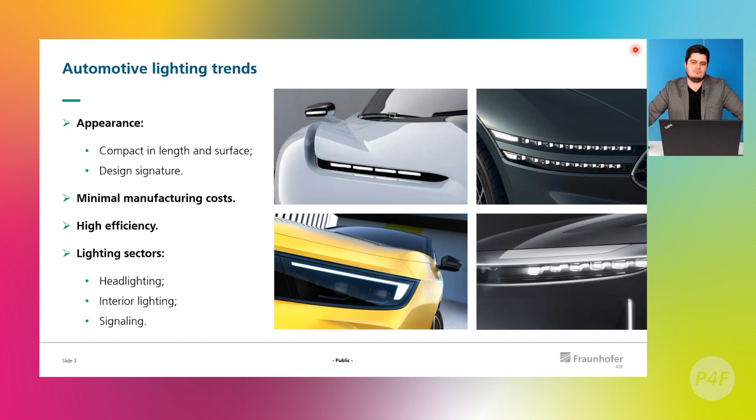At the same time, of course, we would like to minimize manufacturing costs. We do not want to lose money on each unit of the module. It still has to be efficient, especially for headlights, because we still need quite enough light on the road ahead of us. So while being compact, we cannot lose too much light. And this is not only applicable to headlights, the same is true for interior lighting and for signaling.

Before I proceed with the motivation for us in this development field, I would like to remind everybody who is already familiar with this concept, and explain for the new audience, what kind of micro-optics we are talking about.

So roughly 10 years ago, in our institute, colleagues developed a so-called arrayed projector. It's a simple system, really compact. It consists of an LED source, in most cases white light LED, then a simple collimation lens, just a single lens, or in some cases two lenses, to collimate the light, and it shines through the micro-optical component. The micro-optical component is a double-sided micro-lens array.

It has a really simple structure. Two micro-lens arrays stand in their mutual focal plane. The entrance microlenses accept light from the main body of the system, and then they target this light through the projecting microlenses, which act as tiny imagers.

Right behind the entrance microlenses, we have a slide mask, or masks, which are nothing else than openings in the form of the pattern we would like to project somewhere on the screen or on the road. These masks individually are imaged by each of the exit microlenses.

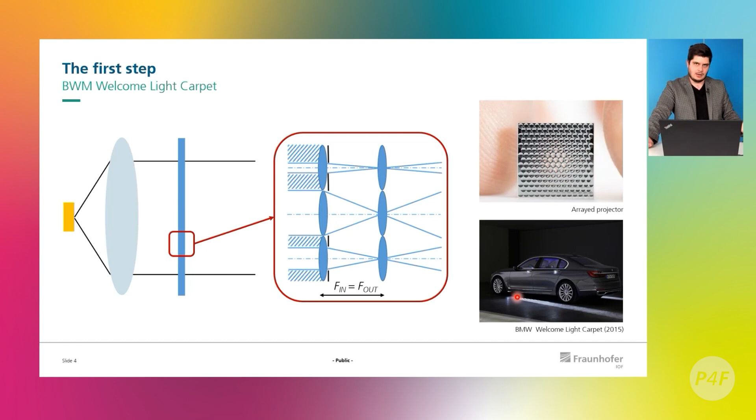And this technology was used for the well-known device called Welcome Light Carpet, developed together with BMW and our institute in 2015. It's really compact. The idea is to project nice recognizable features somewhere around the car - for example, this one welcomes the driver - and there is not so much construction space underneath the car. So compactness was the killer feature for this device.

And by saying it's compact, I really mean it's compact. This is the surface of the micro-lens array which projects the pattern - it's a little bit less than my finger.

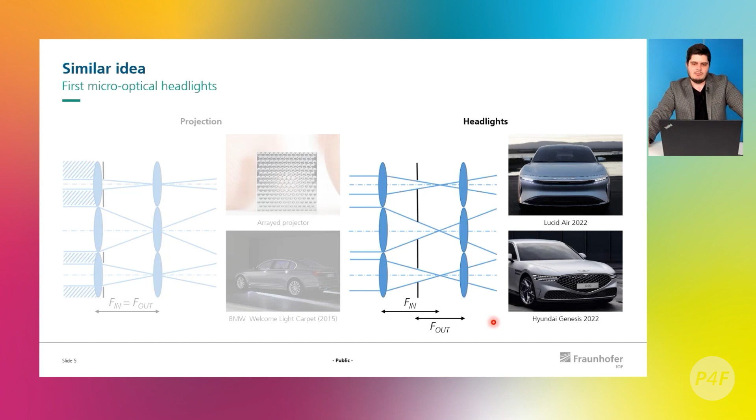The same idea was also applied in a couple of cars, the Lucid Air and the Hyundai Genesis, in 2022, for the headlighting. Same idea, slight differences for the sake of different function, but we still have the absorbing masks which act as the beam shaper - they form the contour and the profile of the beam in the way we need it.

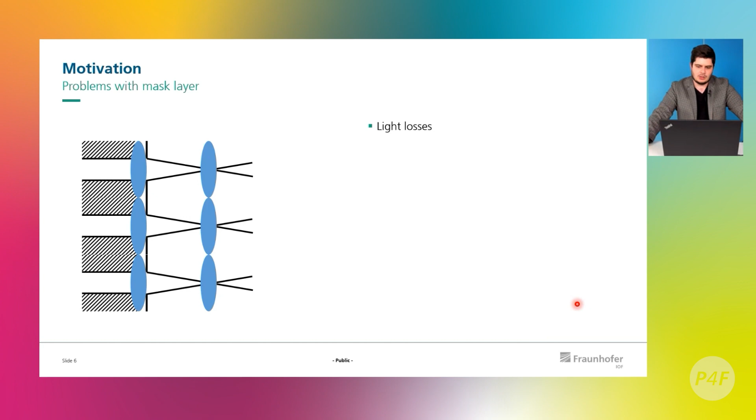If there are masks, or in other words absorbing elements, there are obvious problems with that. First of all, we lose light, so we are not being really efficient - we block most of the light cone which enters the micro-optical beam shaper. Second, this light gets absorbed by the masks and heat dissipates a little bit around the component, which can cause unwanted element aging.

And last but not least, and actually the most important, is that to produce such a component on a large scale of area - not the small one I showed you, that's okay, but if we want to apply it for a headlight it's much bigger - it means mass production gets more and more expensive, because we have to apply alignment. These two sides, or actually three sides - entrance microlenses, masks, and exit microlenses - have to be really well aligned with each other. And doing this while producing at mass scale, each time for each unit, is a little bit costly.

So this is basically our motivation for the further developments. The idea is to get rid of masks, or as we say, go maskless. But we still need to do the same kind of functions for the pattern projection and for the beam shaping.

And the advantages are clear. First of all, we bring up the transmission. And second, we potentially make the manufacturing processes a little bit simpler and less expensive, because if there are no masks, if there is nothing in between these microlenses, then it can be a monolithic structure.

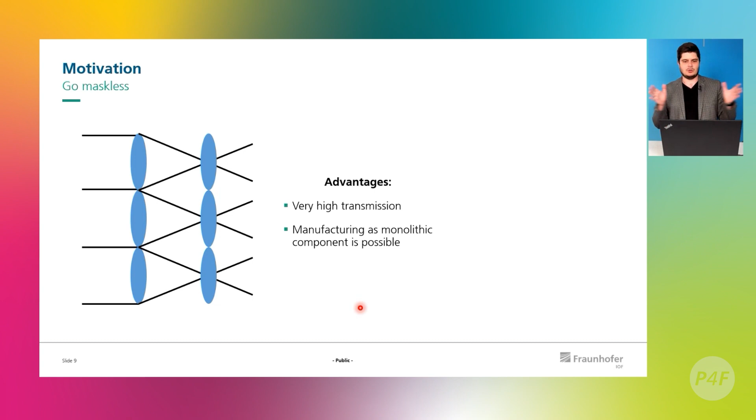So to prove to you that it's actually efficient and nice, we are going to discuss today three showcases, three different systems built on more or less the same approach with maskless micro-optics. The first one is projective turn indicator, or in other words, blinker. Second is low beam, and the final one is adaptive driving beam.

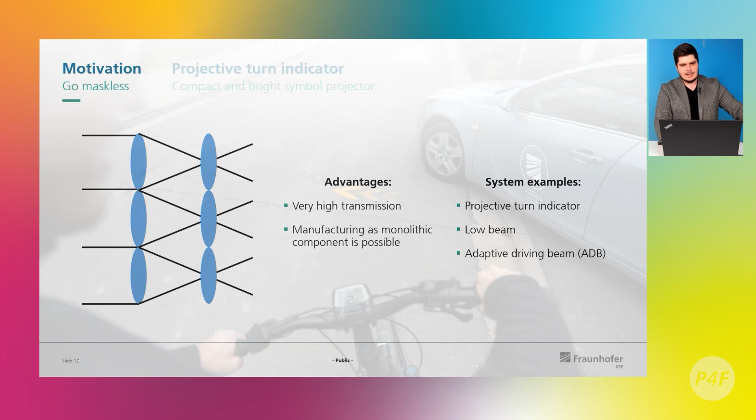So we start with the projective turn indicator, and by projective I mean that it's a device which projects the chevrons, which indicate the direction of the turning of the car, onto the surface of the road, which can be recognized well by pedestrians and cyclists to increase a little bit the safety of driving today.

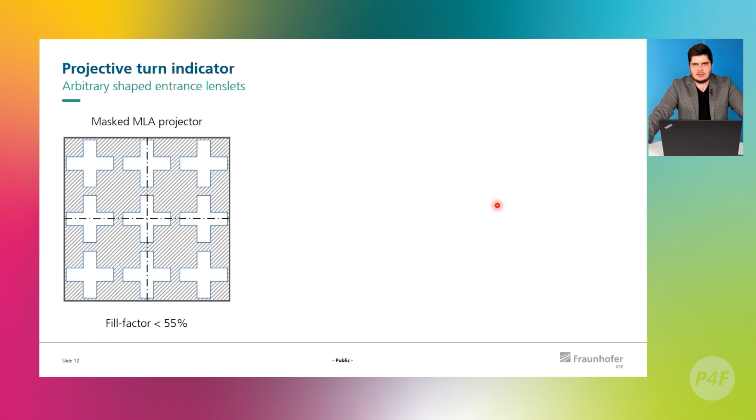So let's assume that we still have masks and we would like to project a certain pattern on the road, for example this cross. If we have masks, this looks like that in the front view, and you can easily see how much area is lost. So the fill factor is less than 55%, and it's not nice, it's not efficient.

Our idea is to remove masks and let the entrance microlenses act as the object to be imaged or projected on the surface of the road or on the screen. It means that the entrance microlenses themselves have to have this shape which we are going to project, for example this cross again here.

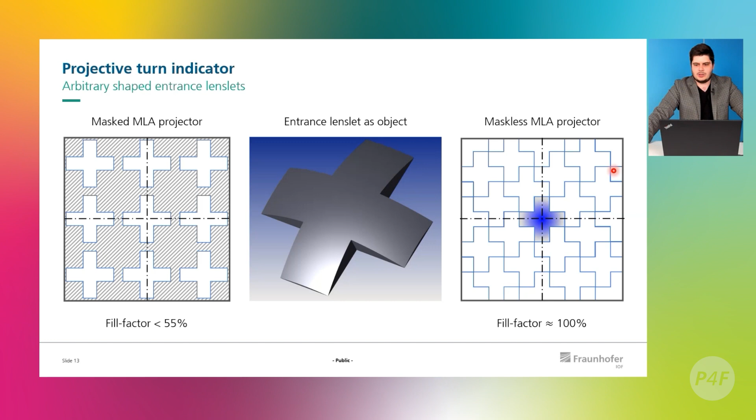And when we tile these entrance microlenses next to each other, we can see that the fill factor, the area which acts in a useful way for us for the projection, is actually around 100%. So potentially it brings a lot of transmission in the system, and it makes our patterns on the road or on the screen much brighter.

When it comes to different shapes, there are three different possibilities for such systems. The first possibility is when our desired pattern is already tileable by itself, so that we can replicate this pattern on the entrance array and we will not have any dead zones, we would not have any gaps between the microlenses. This is the first and the nicest case.

If we wanted to project a letter T, for example, this is a little bit more complicated because you cannot tile such a lens next to each other without any gaps. But in this case, we can decompose the pattern into elementary structures and then project them accordingly to form the final target.

And the last case, which is much more difficult to realize, is when we cannot avoid these gaps between the microlenses at all. For example, if you would like to have a projector which projects a homogeneous white rectangle, but under some angle, you have to take into account the keystone and distortion, and it means that the microlenses acting as objects have to be distorted in the same way. And it brings these dead zones.

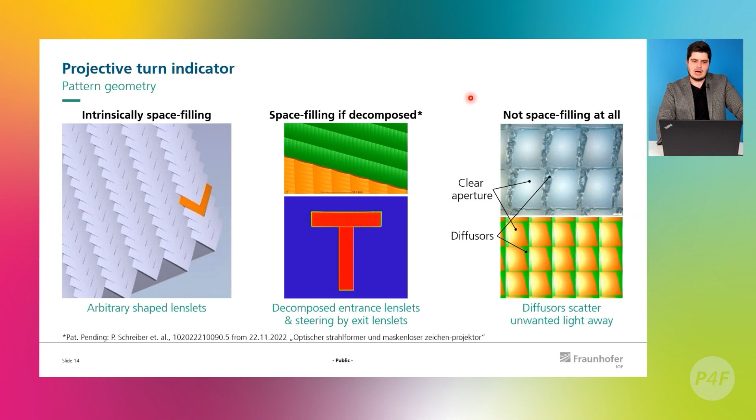To fill these dead zones with something, because we just cannot block them, there are no masks again, we decided to apply diffusive structures which would at least smear out this unuseful light around the whole projection. This brings a little bit of contrast downfall, but still keeps the system easily manufacturable and very efficient. So our case, fortunately, is with chevrons, the first one, so let's proceed with that.

So the idea in the project was to have a projector which can be installed somewhere in the headlamp of the car, or maybe where the usual blinkers are mounted, and it would project these 3 chevrons on the surface of the road. How to generate 3 chevrons with only one projector?

It's pretty easy. We apply something we call crosstalk. So if we have a single LED under the collimator and we shine with it through the micro-optics, then we would generate 1 chevron. And if we apply 2 more off-axis LEDs, then they are being collimated by the same lens, and they shine through the micro lens arrays under an oblique angle. What happens is that each entrance microlens starts interacting not with the opposing one, but with the next or next-to-next one. And this generates the twins of the original chevron.

And this is the function of this crosstalk, which we can utilize to make it semi-dynamic.

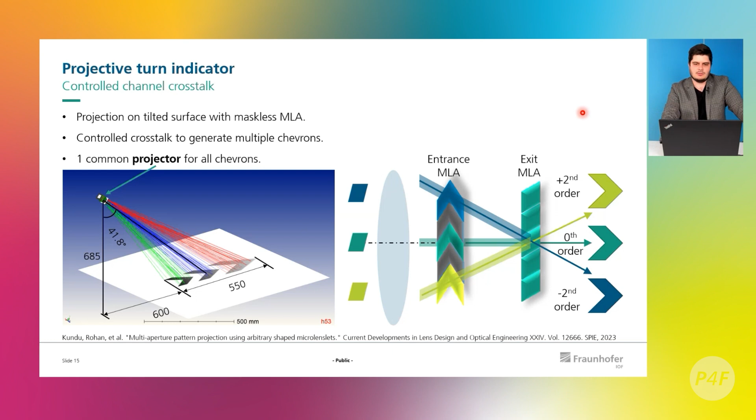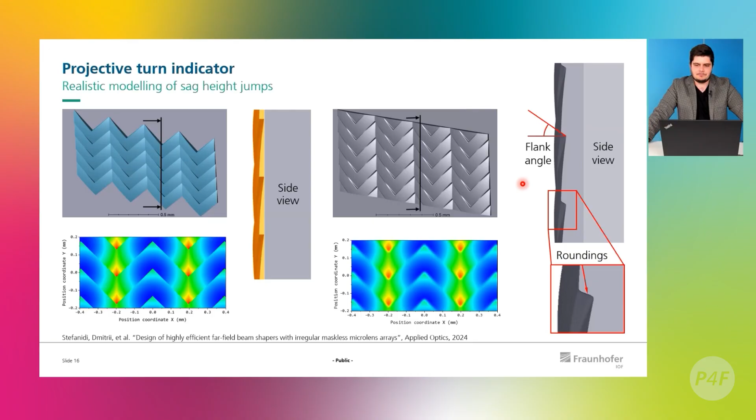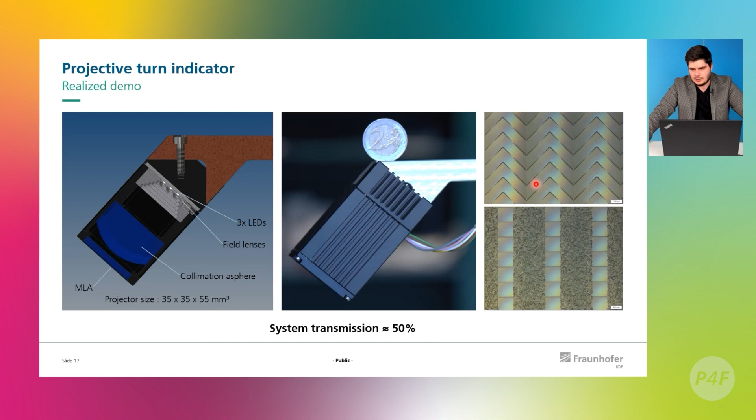And this is the realized demo. It's also not that bulky. I also have it here, so you can compare it with my hand, for example. So this is something which can be installed directly into the headlight and act as a blinker. Here you can also see a little picture of the microlenses through the microscope, and those dark lines are nothing else but the sag height jumps which I mentioned.

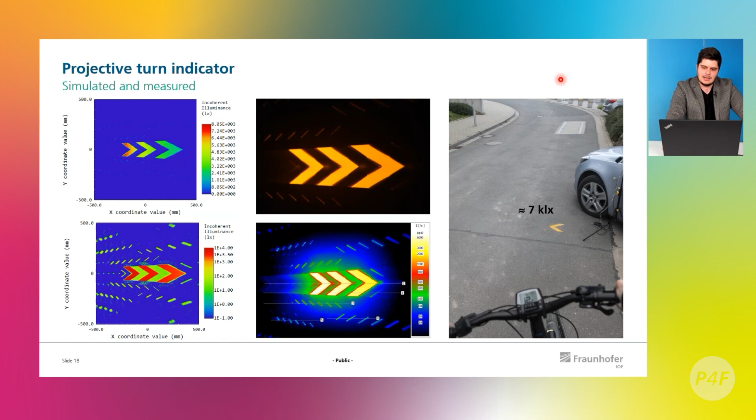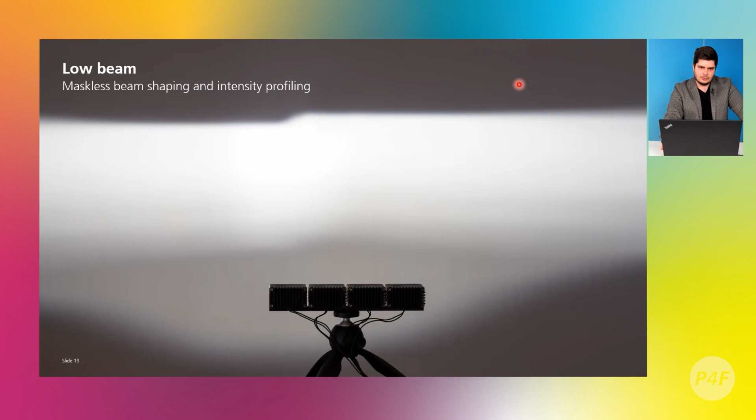So next would be the low beam. And the low beam is an entirely different system. It's a combination of pattern projection, something with a specific shape, and also the shaping of the intensity of the beam. Even though it's a different system, we still apply more or less the same concept: still micro-optics, microlenses, still maskless, but there are a few different details here.

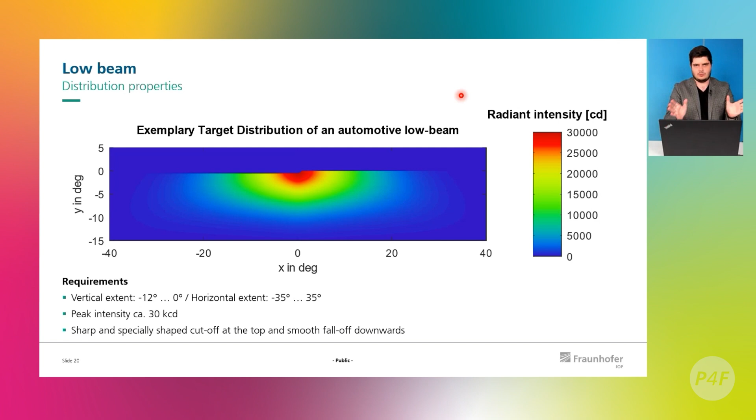So our target is to have such a beam when you project the low beam perpendicularly on the screen, not on the road, but on the screen. And the idea is to have a little bit more light on the right-hand side, so you can still drive safely, and a little bit less light, pointed a bit downwards, on the left-hand side to prevent glare for oncoming drivers. You can see here that the target is not homogeneous, that's one thing. Then the target is really, really large, so the horizontal field of view is enormous compared to the blinker, for example.

So we've designed a system which fulfills all the requirements for such a beam. It's a little bit more sophisticated. We still use one LED, but now a two-lens collimation system: a simple sphere from stock to collect as much light as possible from the LED, and then a custom anamorphic lens which produces this large field of view in the horizontal direction, which we need because the beam is really wide, and a narrow vertical field of view which later on will be shaped additionally by the maskless micro-optics.

The first task in this case is to be able to correctly accept this diverging beam with the micro-optics. Since there is not so much divergence in the vertical direction, or in the side view, we can start with a really simple regular arrangement of the microlens arrays. But in the horizontal direction, from the top view, you can see that the size or the pitch of these exit microlenses is noticeably bigger, and this helps us to correctly accept this large, wide, diverging beam from the collimator.

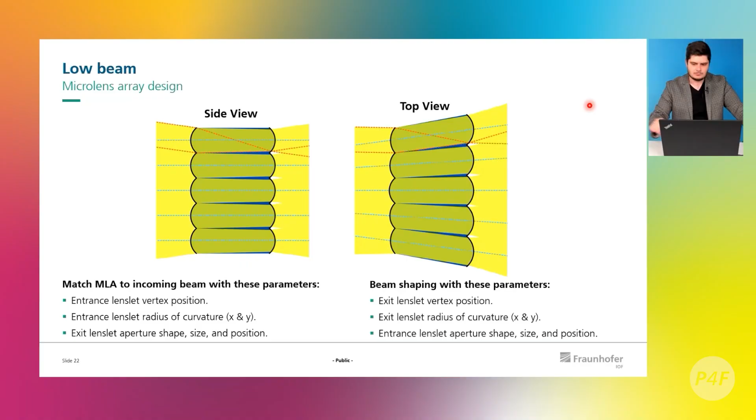Then there is another task: how to produce something which is not homogeneous, and still without masks. With masks, it's easy—you can change the opening of the mask in each channel. For example, here it's smaller, here it's bigger, and when they overlap in the beam with each other, you produce the arbitrary profile of the beam's intensity or brightness. But how to do it without masks?

The solution is what we call an irregular fly's eye condenser. A fly's eye condenser is a general arrangement of such optics, and irregular means that we start playing with the parameters of each individual channel in the system. We can change the size of each entrance microlens and its position, and we can individually steer the vertex points of each exit microlens to control each small beam from each channel individually. This helps us to create non-homogeneous, or in other words arbitrary, intensity or brightness profiles of the beam, which is essentially needed for the low beam.

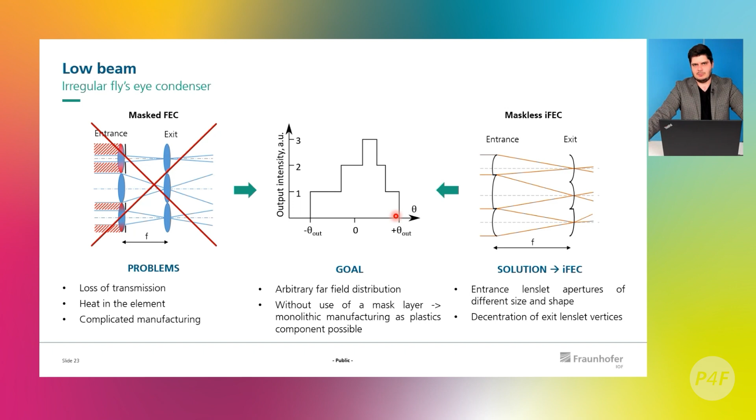And the last but not least task is to be able to produce this sharp and asymmetrical cutoff line with a kink in the middle.

So let's say that we start with a simple rectangular lenslet. As you remember, the shape of the lenslet is essentially something which is projected, so if the lenslet is a rectangle, then our beam will be in the shape of a rectangle as well.

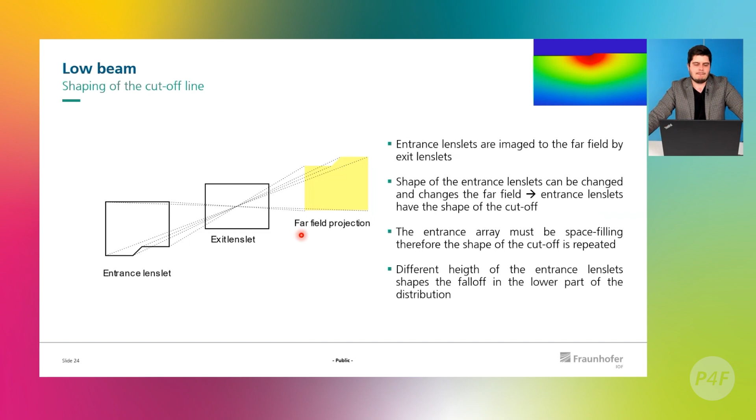If we start playing with the shape of the entrance lenslet, then it will be automatically repeated in the beam, because it's a simple one-component imaging. But to be able to tile such entrance microlenses without any gaps, we have to repeat these structures at the other side of the microlens.

And here it becomes a little bit tricky to explain. What we usually say is that whatever the upper edge or lower edge of one microlens is, it's exactly the lower or upper edge of the neighboring microlens. The problem then is that with such arrangements, the beam would look like a step with two kinks. But in our target, there is no second kink, so it's only upstairs.

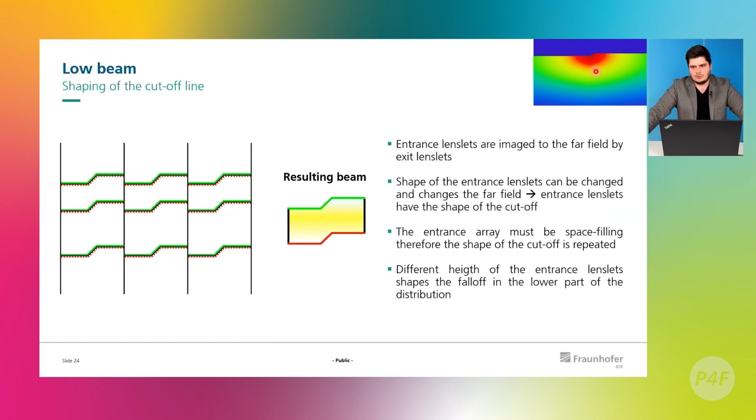And if we just let it be like that, then we are going to have what we call an evil twin of our kink, which is not allowed to be in the low beam. There's another trick - not final, there are many more - for how to hide this evil twin. We change at each channel in the micro-optics, and there are thousands of them, the position of this kink, and we realign the upper part with the exit microlenses afterwards in such a way that we still have the functional one and we don't see the non-functional one.

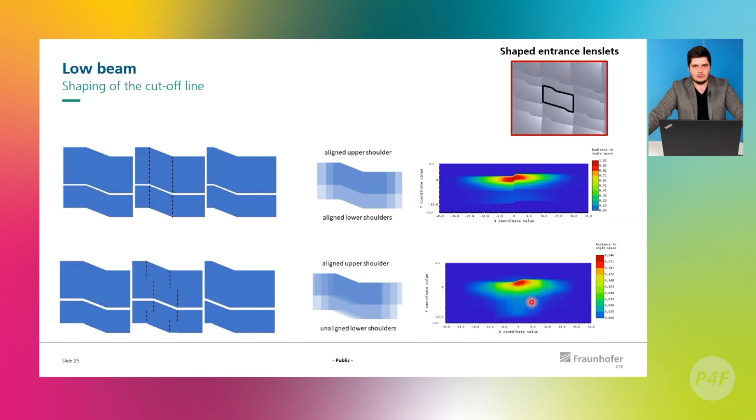So here we can have a little peek into the micro-optical structures. This is the entrance array, a really small part of it, taken from the microscope objective, and you can recognize those steps of the kinks. You can also see that the vertical extent of microlenses changes - this is for producing the vertical profile of the beam.

And the exit microlenses are a little bit easier in structure. These are just squares or rectangles, and yeah, these are not that interesting.

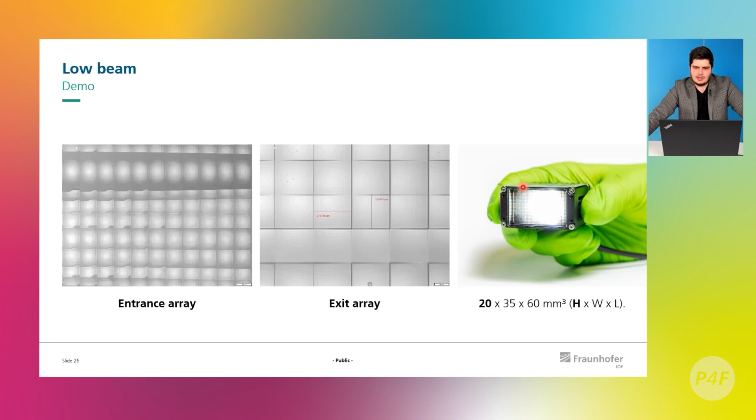And here you can see the picture of the module itself. I also brought it with me. So when I'm saying it's compact, I don't want to trick you - it's this. You can just play with it, put it in your pocket. If you have a power bank, you can shine it as a torch if you like. This is something which we do at exhibitions and fairs usually.

And finally, I would like to show you some optical results for the low beam. So these are two measurement pictures - not simulations, we measured that with specially equipped equipment, and then we processed that in software, I guess MATLAB, I don't remember. And here you can also see the real picture of the beam being projected at 10 meters onto the screen.

First of all, I would like to point out that the beam has really little amount of stray light - the light which we don't want to have in the system. There are some lines underneath the beam which also happen due to the SAG height jumps, due to these shaped microlenses on the entrance, but still these structures are below the beam. They can be blocked by housing and they are not going to be harmful for the driver.

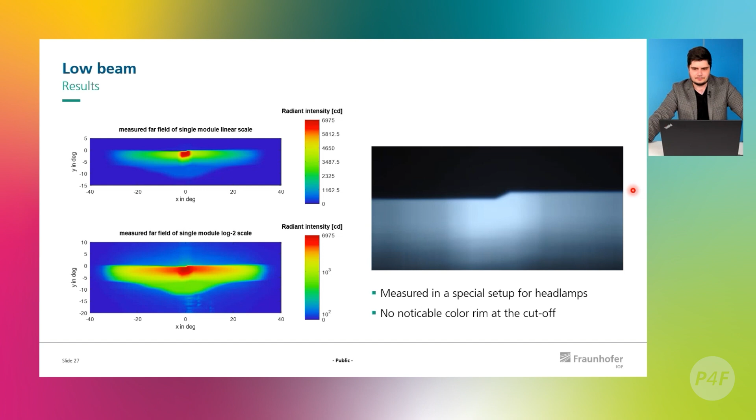So to summarize a little bit about the low beam, we were able with one of these little guys to produce 7,000 candelas on the road in the beam of the hotspot.

Those who know the regulations will say, of course, it's not enough. That's true. But we can apply, for example, 4 such modules, and this is the photo of the final demonstrator for the low beam, which would just overlap and then produce the sufficient amount of brightness on the road. So, for example, with 4 modules and the correctly chosen LED, we expect around 42 kilocandelas, which is even a little bit of an overkill for the regulations.

Sharp cutoff, no color, and most importantly, the transmission of such a system is roughly 70 to 75%, including a couple of percent of the stray light.

And this is what we are particularly proud of, because at least to our knowledge, right now on the market, such numbers are probably unreachable. So even if you have not really powerful LED, and if you especially don't have much construction space, this is a perfect solution for you, because the efficiency is something which essentially brings the brightness of your beam on the road.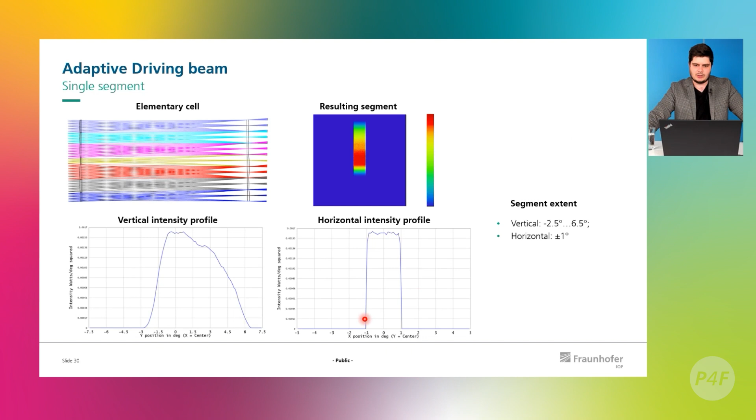Our target was for the extent of the segment to be approximately plus minus 1 degree in width. Obviously, the smaller the better, because then the beam becomes more and more flexible. You can switch off really fine features, but inevitably there are some limitations. In our case, it's diffraction, because the extent of the segment is directly linked with the numerical aperture of the microlenses, and if we go too low, we get noticeable diffraction, which brings down the performance.

As I said, we have to produce many of such segments. In case of these systems, there are 23 vertical segments which build the whole beam. To produce them, we apply the same concept we used for the blinker, the projective turn indicator. We apply crosstalk, meaning we use not only one LED on axis, but many of them, 23 in this case, each collimated with the same collimation optics, and each shining through the microlens arrays at a specific angle, which creates a set of adjacently placed vertical segments in the beam.

And obviously, if we switch off a particular LED, it means we create a certain vertical dark tunnel, also called an adaptation tunnel or safety tunnel, in the beam. The logic is simple: wherever you're driving, if your car detects with the camera another car somewhere 200 meters or maybe 100 meters away, the system detects that and automatically switches off the specific LED or LEDs to darken out this area with that car.

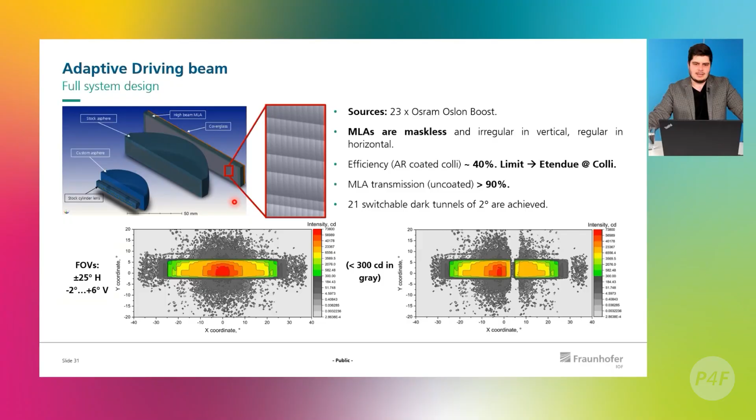We built a demonstrator and characterized it in our lab, but lab characterization is first quite boring and doesn't reflect reality, because the high beam is supposed to work at a long distance, more than 50 meters. If you shine such a module on a screen at only 10 meters, it looks worse than it's supposed to.

But we had to ensure we are able to create sharp dark tunnels, which is true. Those noticeable lines between the shining segments are exactly the result of insufficient projection distance.

So to really test it out, we took it somewhere on the road here in Jena, in dark surroundings, and pretended that we actually already have such a headlight. You can see the demonstration of the system pretty easily.

There is a pedestrian who just walks for no reason in the dark and talks on the phone, and the car detects that and switches off the specific part of the beam so as not to blind this person. On the road it looks actually as it's supposed to look.

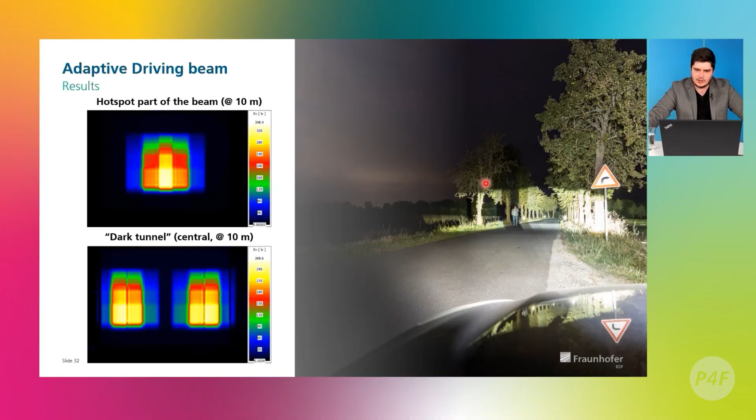To summarize, the third prototype I wanted to show you today is really compact. I didn't bring this one with me because it's a little bulkier than low beam, but our target was for the headlights to always fulfill a really small vertical extent of the system. I mentioned that compactness and design feature is key for development in automotive lighting, and today the trend is to have slim-like headlights that appear the same as the daytime running light.

So we hit that target. We were still able to preserve at least 40% transmission with that, limited by laws of physics. And we can reach pretty high values of brightness for such beams. With even one or two modules, we can reach approximately 100 kilocandelas on the road, which is way more than the regulations require.

Now I would like to talk about what is essentially a concern of every automotive partner. Everybody, after I give such presentations and show our demos, asks: that's nice, really impressive, but how can we manufacture them? And specifically manufacture with not so much additional cost.

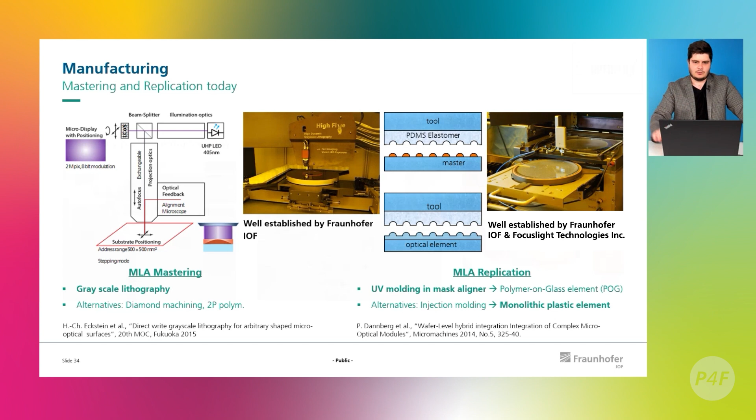But since we don't have any masks, we can enable other technologies to be applied, for example injection molding. And here is where we are sure we can save some costs for mass production.

We had a project done together with our partner Optoflux, where we wanted to repeat our masters for the blinker, for the chevron-like microlenses, with high precision injection molding.

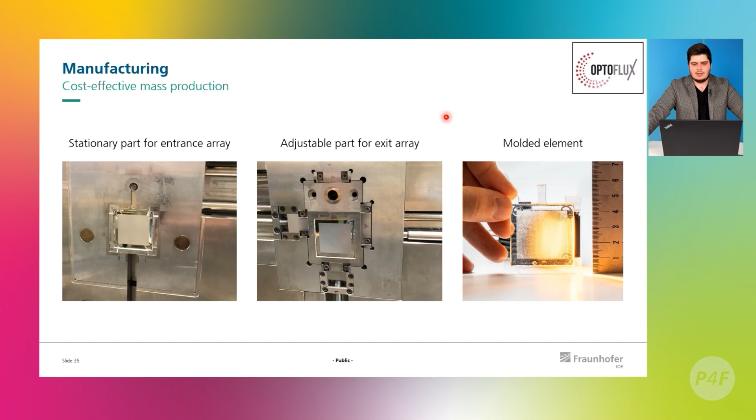Here you can have a little hint of the tool. One of the sides is adjustable, so the idea is to perform the alignment one or several times before mass production, fix everything, and then just do the shots and produce many of such components to save money.

The target of the project was to prove that we actually can do that with sufficient quality. Here is the first visual hint of how these micro-lens arrays look with two different ways of production. On the left-hand side is polymer on glass, our gold standard, basically the standard for quality. On the right-hand side is what we would like to study, the injection molded pieces.

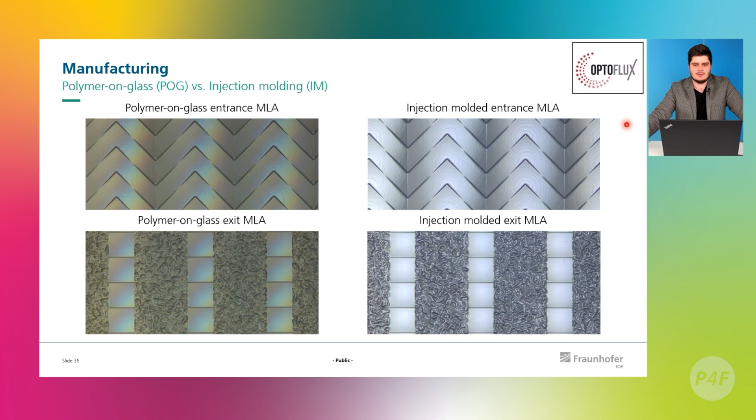Visually there is no difference - they look 99% the same. And fortunately, the performance is also not that far away from each other.

So, for example, if we get into the details and check all the optical parameters like the radius of curvature and the extent of a single microlens, we can see that the difference between the two manufacturing techniques is really, really small. With the polymer on glass technology, we had roughly 2 or 3% deviation from the master, and only 1% deviation with the injection molding. That was really a fortunate occasion.

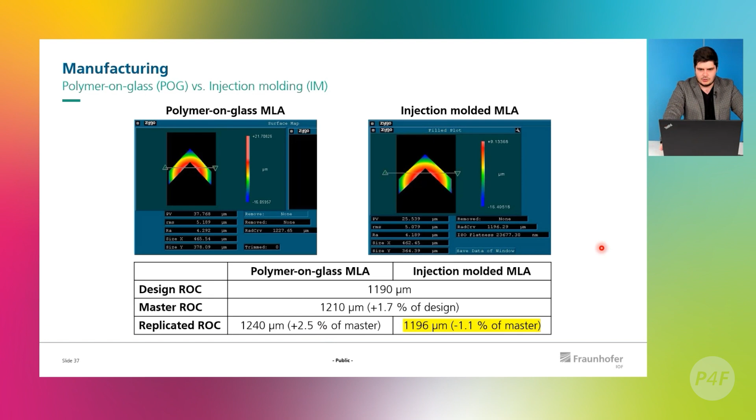One more detailed slide. We took 3D topography scans with a white light interferometer of these structures to analyze the regions between the microlenses, since these are the most important—they bring most of the stray light into the beam. We can see that these regions for the two manufacturing methods are close to each other; the difference is only a couple of degrees in the slope of these dangerous regions.

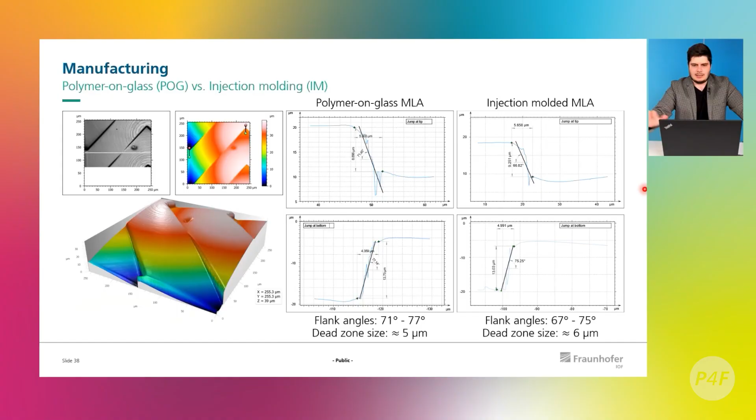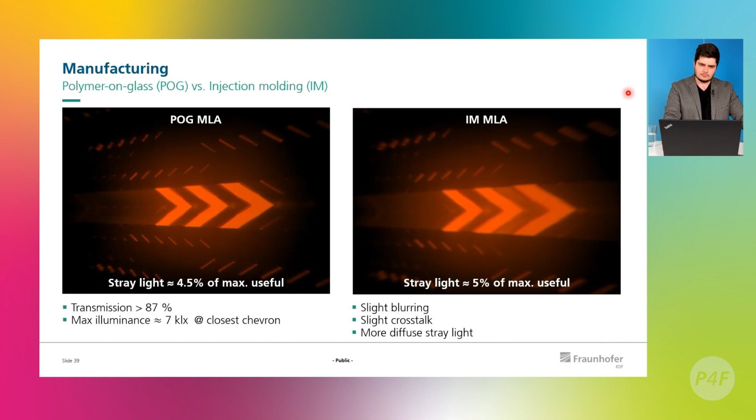I wanted to show that with the gold standard technology—expensive polymer on glass—we can achieve approximately 8,000 lux for the first chevron. With injection molding it's 6,000 or 7,000. Sounds like a big difference, but on the road, especially with sunlight, it's not that much of a difference. The message is that they're pretty close to each other, and our conclusion was that high precision injection molding can indeed help get such structures produced at mass scale.

So I'm ready for the conclusion.

I hope I could bring the message that our maskless double-sided microlens arrays are cool, at least fun to play with and to look at. They are really efficient, especially compared with solutions using masks, no matter if it's a micro-optical solution or a classical solution.

We can achieve something like semi-dynamic pattern projection. We cannot be completely free with the choice of pattern shape, but there are still some shapes useful for the automotive market, like a warning sign, rectangles, or other shapes, and we can produce them in a nice and efficient way.

We are really flexible with profiling the intensity or brightness of the beam, for example for low beam, when we don't want it homogeneous. So there is large design freedom—we can have different systems. It's not limited only to low beam, high beam, and blinker. It can be a static high beam or something else, or warning signs, as I mentioned.

To some extent, we can customize a specific system by just changing the MLA. The collimator probably can stay the same, and you just replace one micro-optic with another. I don't mean you'll get a completely different function, but there will be some adjustment—for example, you can change a European low beam to a Japanese low beam just by switching the side, and that's it, you don't have to do anything else for the system.

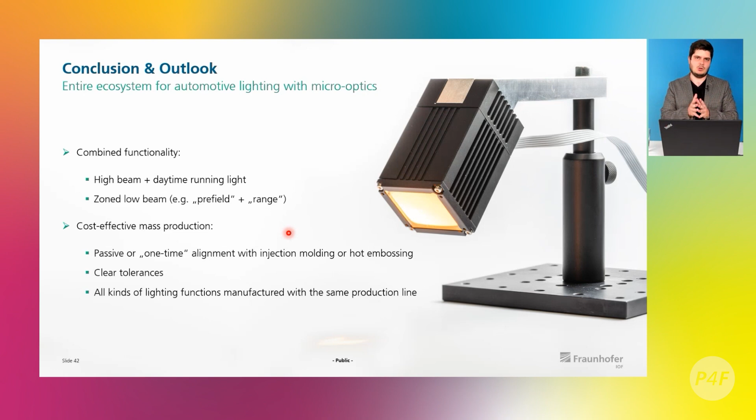Finally, probably most important for automotive players, it enables cost-effective mass production. As I said, you adjust your tool once or several times, and then produce several hundreds of pieces. There are clear tolerances, both in the design process and in manufacturing. We've studied this extensively, and basically many types of automotive lights—high beam, low beam, blinker, anything else—can be produced to the biggest extent with one production line. You just change the masters, the mold structures, and you're good to go to produce a new function.